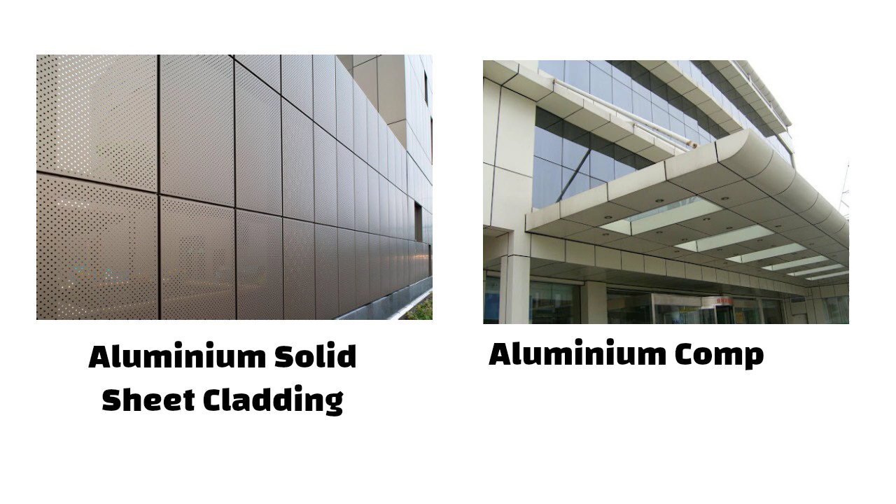Hello friends, aluminium solid sheet cladding and aluminium composite panel cladding are two different types of cladding systems used in construction. In this video, we will be discussing the differences between these two systems. So let us get started.

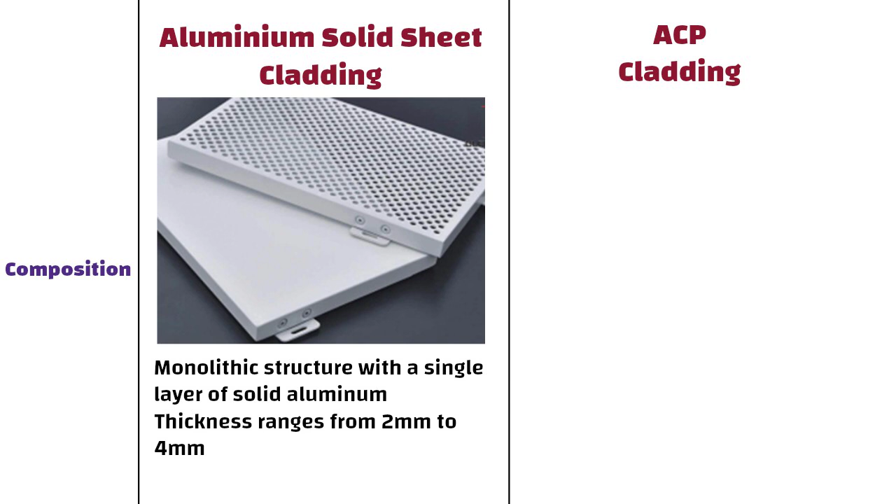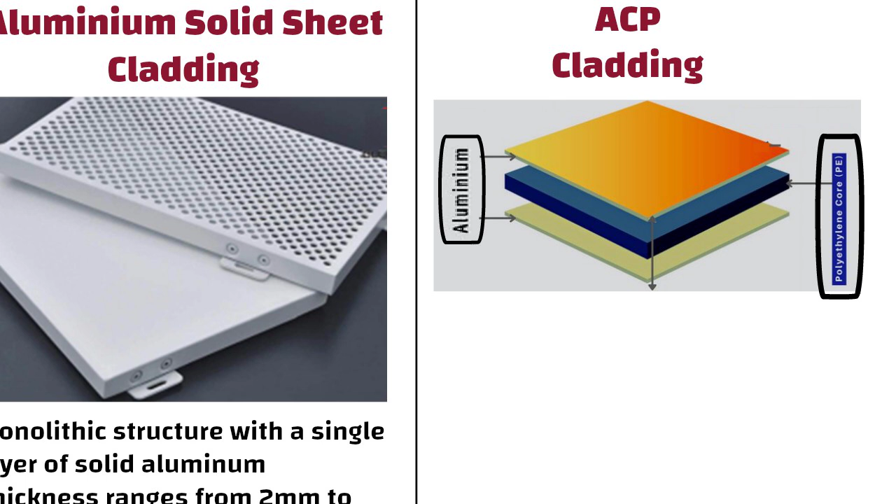Composition. Aluminium solid sheet cladding is a monolithic structure with a single layer of solid aluminium. Normally, the thickness ranges from 2 mm to 4 mm for cladding. On the other hand, ACP comprises two aluminium sheets and a core material often made of polyethylene sandwiched between them. The thickness ranges from 3 mm to 6 mm.

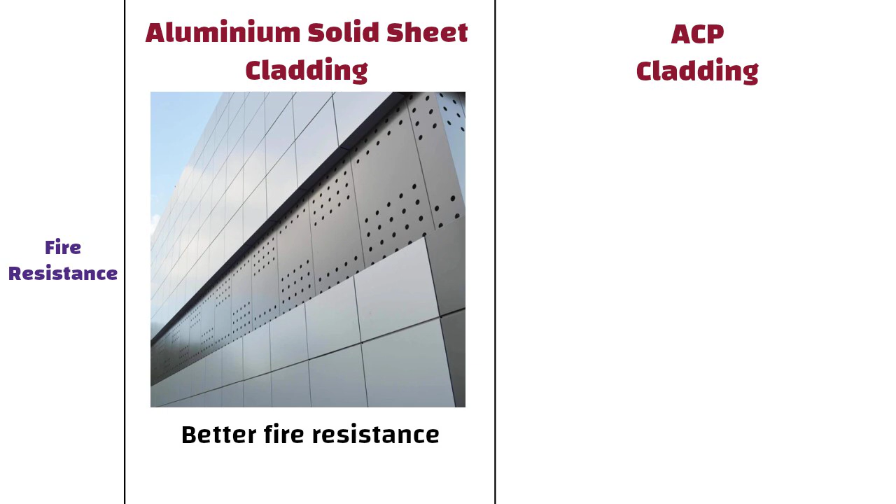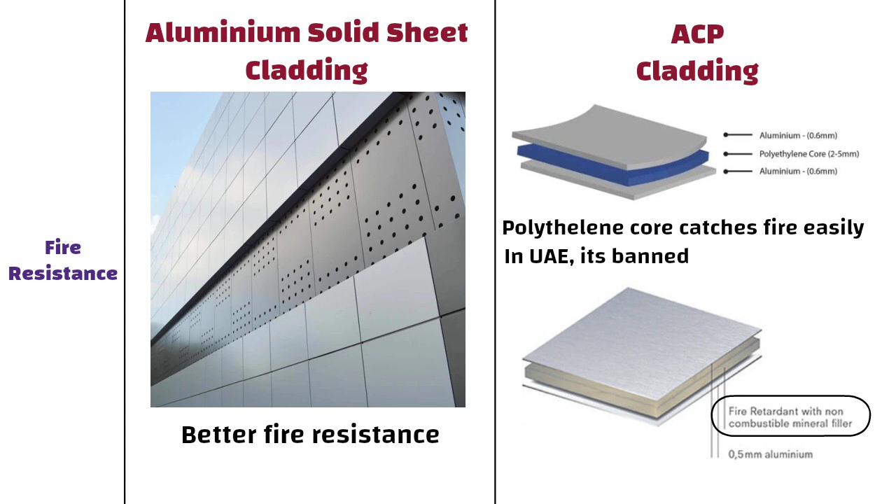Fire resistance. Solid aluminium cladding has better fire resistance compared to ACP cladding, whereas ACP with polyethylene core catches fire easily. Hence, in countries like UAE, it is banned. ACP with a fire-resistant mineral-filled core material has more fire resistance, but not better than the aluminium sheet cladding.

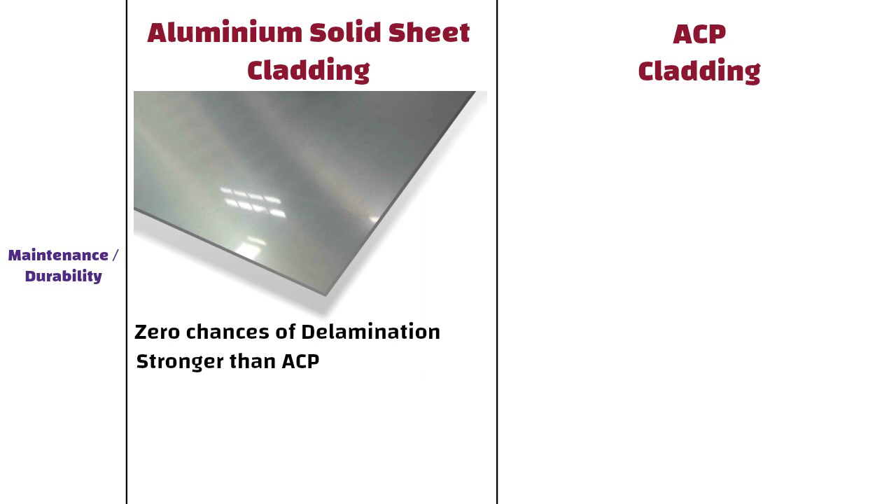Maintenance or durability. Aluminium solid sheet is not a composite material, so there are zero chances of delamination. It is stronger than ACP. On the other hand, ACP is a composite material, hence there is a possibility of delamination.

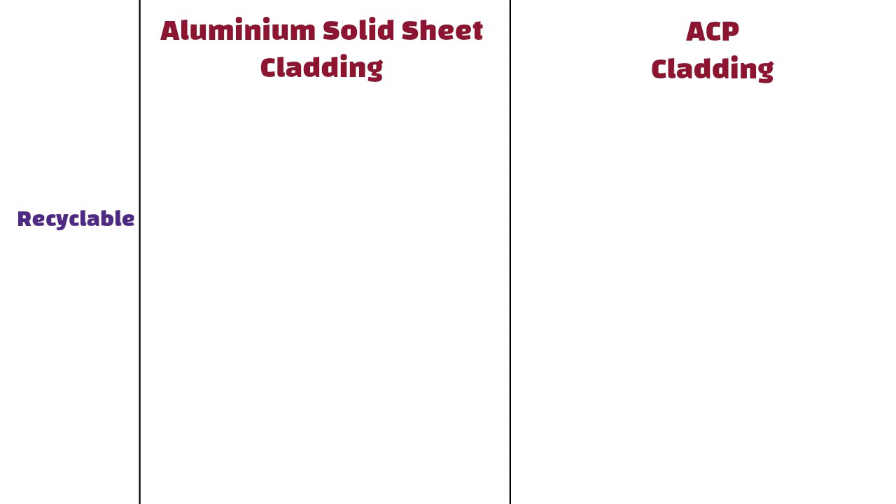Recyclable. Aluminium solid sheet is a 100% recyclable material that can be reused repeatedly. Whereas in case of ACP, only the outer layers, which are approximately 0.5 mm thick, are recyclable. Product. Aluminium solid sheet is a green building product, whereas ACP is partially green building material.

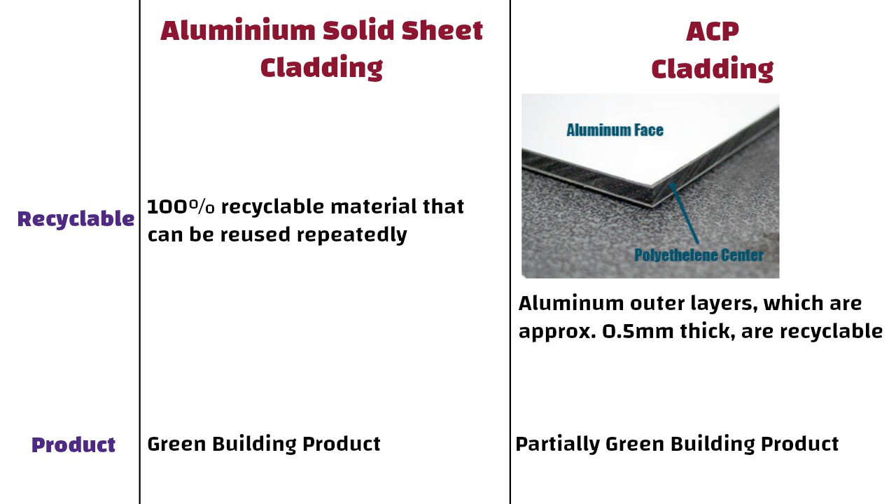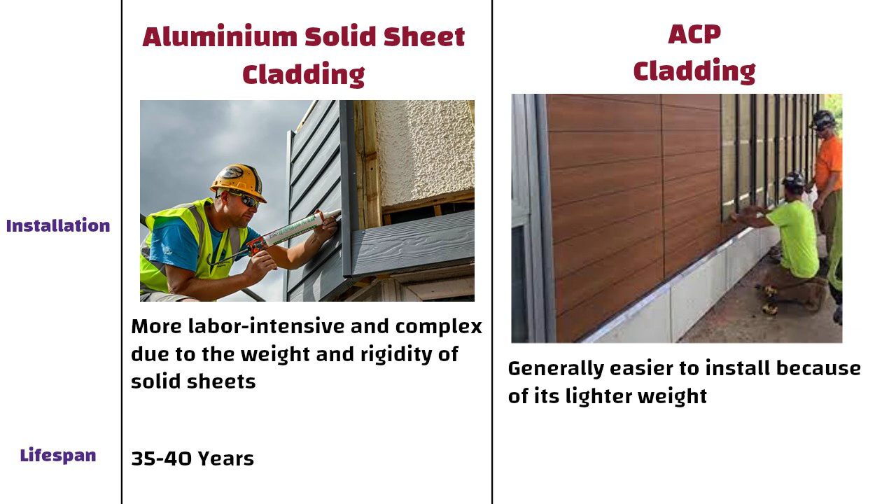Installation. The installation of aluminium solid sheet cladding can be more labor intensive and complex due to the weight and rigidity of solid sheets. On the other hand, ACP cladding is generally easier to install because of its lighter weight. Lifespan. The average lifespan of solid aluminium is 35 to 40 years, whereas the average life of ACP is 10 years.

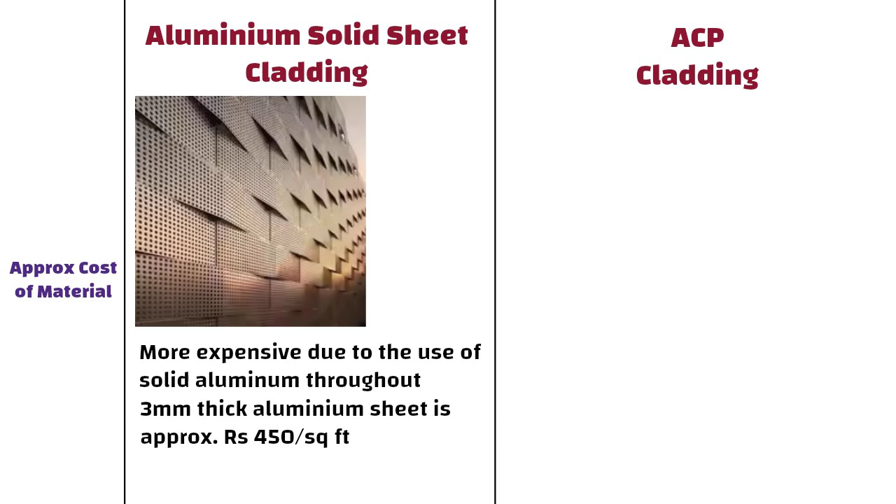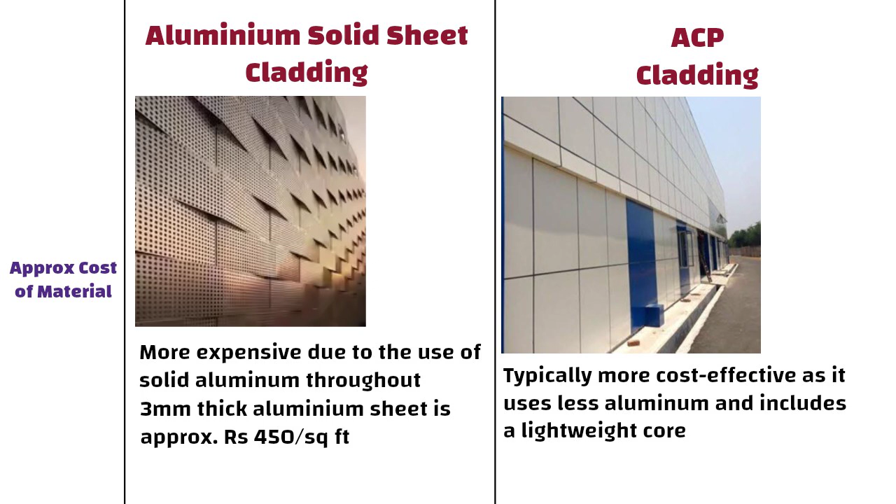Approximate cost of material. Aluminium solid sheet cladding is more expensive due to the use of solid aluminium throughout. The price of 3 mm thick aluminium sheet is approximately 450 rupees per square feet. On the other hand, ACP cladding is typically more cost effective as it uses less aluminium and includes a lightweight core. The price of 4 mm thick ACP sheet is approximately 230 rupees per square feet.

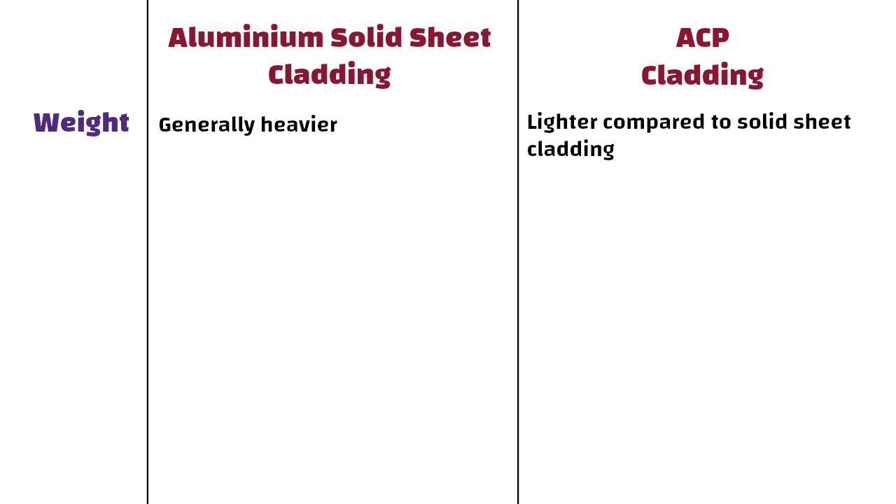Weight. Aluminium solid sheet cladding is generally heavier than ACP due to the solid aluminium sheet, whereas ACP cladding is lighter compared to solid sheet cladding because of the lightweight core material.